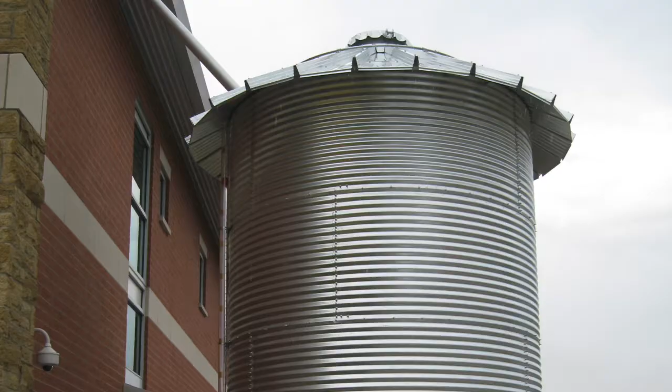Bill Mollison, the father of permaculture, and David Holmgren began producing ideas based around continual agriculture practices in the 1960s. Mollison and Holmgren were concerned with the increasingly negative effects of industrial agricultural practices in Australia, such as reducing biodiversity and removing loads of fertile topsoils from numerous landscapes.

Permaculture 1 was their first public response to these mounting pressures in 1978, detailing their design approach to agriculture they called permaculture. Within a few years, permaculture was expanded to include working toward sustainable human habitats. Further work developing their concept and designing various sites led to Permaculture, a Designer's Manual.

Mollison continued to teach the practices of permaculture and put an emphasis upon having his students continue to teach the topic as well, which helped spread the concept around the world relatively quickly.

Permaculture, as we all know, is based around three main goals: care for the earth, care for the people, and return of surplus. The resulting combination values equally the vital aspects of the environment, the needs of human populations, as well as taking only what is needed from the world and reallocating extra resources appropriately.

Designing of ecosystems, landscapes, and human structures is based around the 12 core design principles, each of which is as valuable as the next. When planning any scale of permaculture project, accounting for and utilizing rainwater, as well as groundwater or stored water sources, depending on the site in question, is an incredibly valuable aspect of the plan.

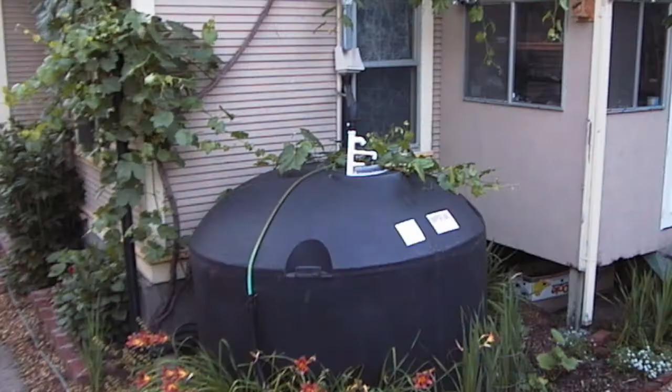A term that is often heard in regards to water resources is greywater. Greywater is simply wastewater generated from domestic activities such as dishwashing, laundry, and showering. Although greywater is not potable drinking water without prior filtration, it may be used for landscape irrigation, among many other uses. Greywater is not from toilets. Toilet waters are considered sewage or black waters to emphasize that it contains human wastes.

Reusing black waters is more complicated and difficult than greywater due to the hazardous nature of wastewaters, but success has been found using these waters in a type of composting known as humanure. Humanure can be a complex system, but needs only to involve the sanitary containment system, usually with organic materials such as sawdust or wood pulp, to help facilitate the composting of wastes over time, as well as a garden or area to use the fertilizer once produced.

Rainwater harvesting systems have come in all shapes and sizes over the years, often becoming more complex in order to better store water safely for longer periods of time. Systems now include specified downspout sizes that increase in price much more rapidly than in size, depending upon the amount of roof in question. This only emphasizes the amount of planning needed for each permaculture project.

Types of systems available are simple tanks, filtration tanks, roof cleaning collection, rooftop collection for gravity-based distribution, and stormwater collection systems. All systems are scalable depending on the size of the structure or structures involved. Examples of each system can be seen here.

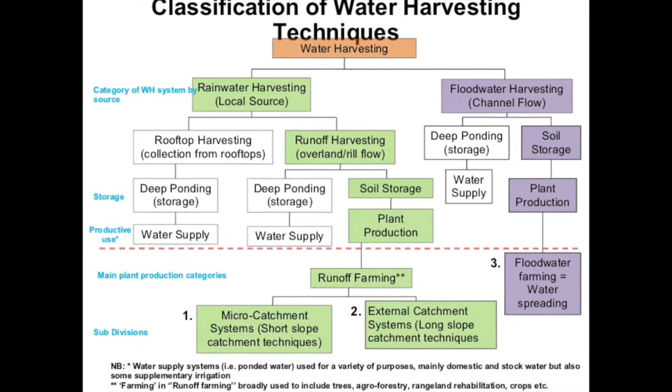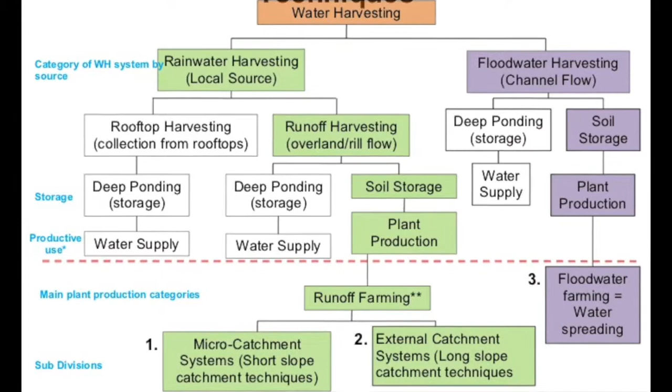Water harvesting techniques include a multitude of iterations in such areas as rooftop harvesting, runoff harvesting, floodwater harvesting, runoff farming, floodwater farming, and more. Uses of these collected waters can include soil storage, deep ponding storage, water supply, and plant production as seen here.

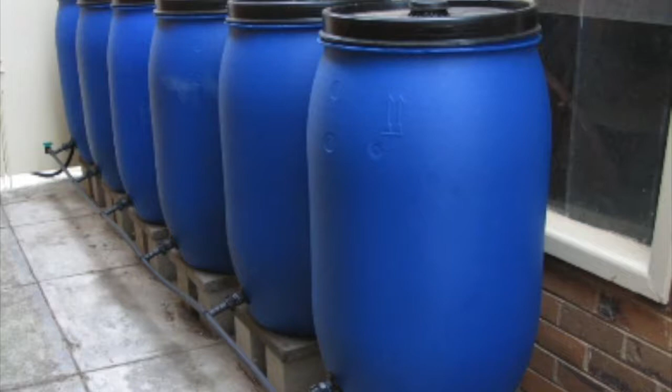Rainwater harvesting with rain barrels is one of the most basic forms of collection and harvesting. Gutter systems simply transfer rains to the barrel placed beneath them. The size of the gutter and downspout should be planned out before installation, but are typically 5-inch gutters and 3-inch downspouts for residential buildings. Placing the barrel as near to the designated usage of the stored water, such as garden in the backyard, maximizes ease of use.

Residential rooftop harvesting, shown here, is utilizing an underground storage container. This system incorporates a header tank in the eaves of its attic to provide gravity-based distribution of stored waters to various water use areas of the house.

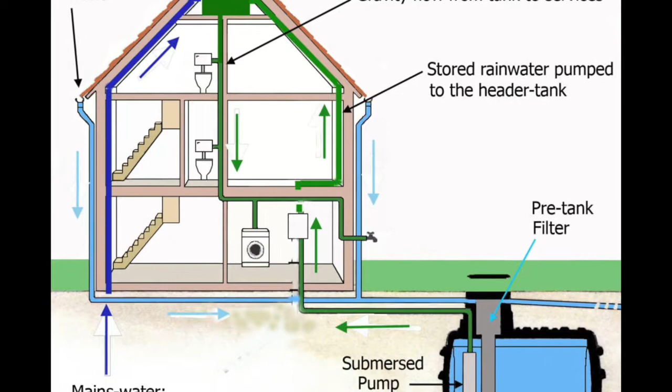The submersed pump in the basement, connecting the below-ground filtered tank waters to the header tank, requires energy input and piping construction within the building, but allows for an efficient distribution and usage of stored harvested waters throughout the residence. This system also connected the header tank to the mains water system to maintain water levels during seasons of drought.

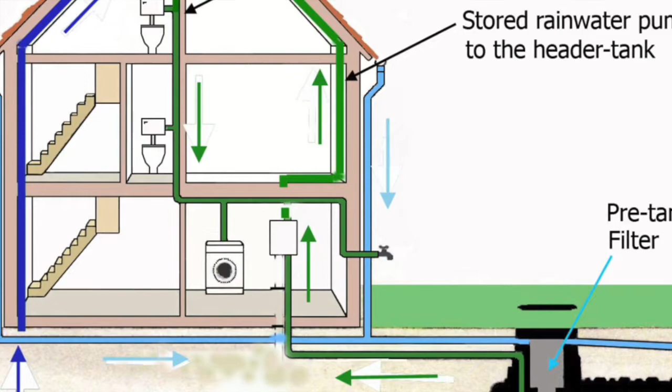Groundwater storage systems are increasingly seen constructed and used in many areas. Utilizing tracts of land as a catchment area can be viable for surface types such as clay tiles, plastic, or asphalt sheets, but requires prior management, potentially including contouring and surface cover removal.

A designated collection tank in the lowest elevation region of the landscape must be made or brought in to match the size and goals of the site, whether for a community garden nearby or for farm water supply supplementation. Extraction devices include bucket, chain, hand, and electrical pumps, along with rope pulley systems, depending on factors including the rate of transfer from the site to its destinations.

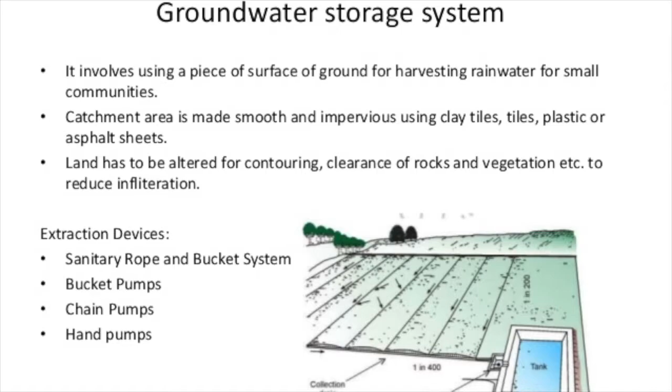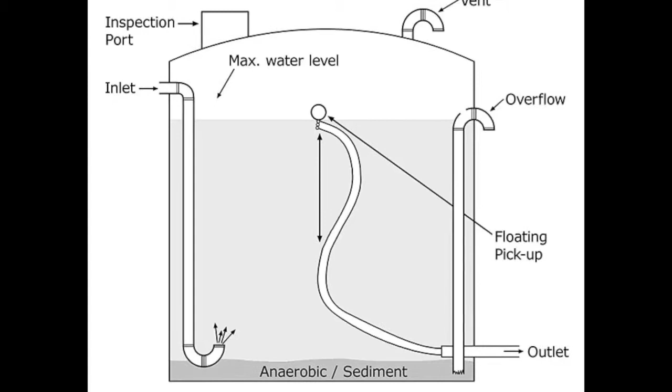Here is an image with the general outline of water storage tanks. Each tank is recommended to have darker colored plastic or denser materials to prevent light infiltration and organism and microorganism growth. The inspection port allows for regular assessment of the tank's sanitation levels and storage rates. The floating pickup access point allows for debris to be removed from the tank with ease as well.

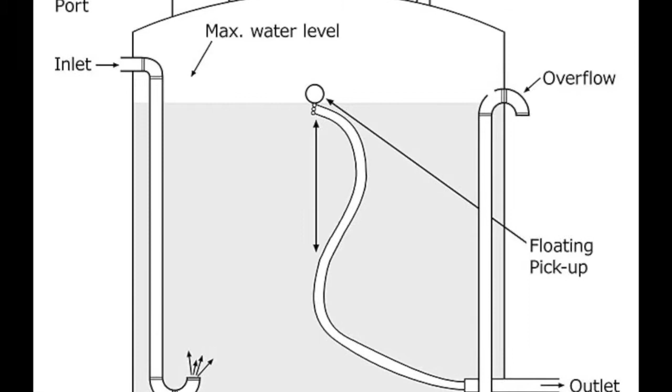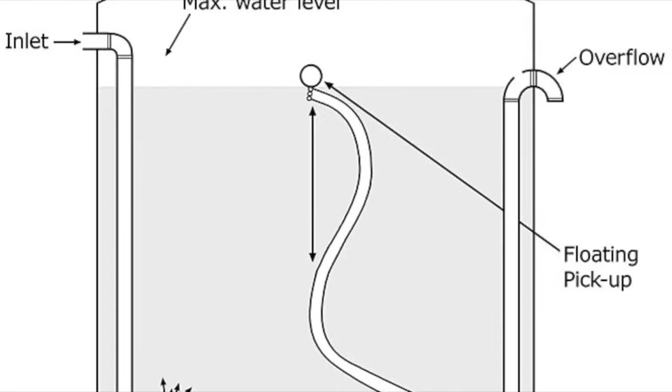A vent and overflow valve are vital aspects to maintaining the water for long periods of time and through storm rain events. Emptying out particulate matter and settled sediments is also a necessary regular maintenance activity for most storage tanks. These can be used in agricultural, residential, industrial, and cultural settings for numerous similar uses.

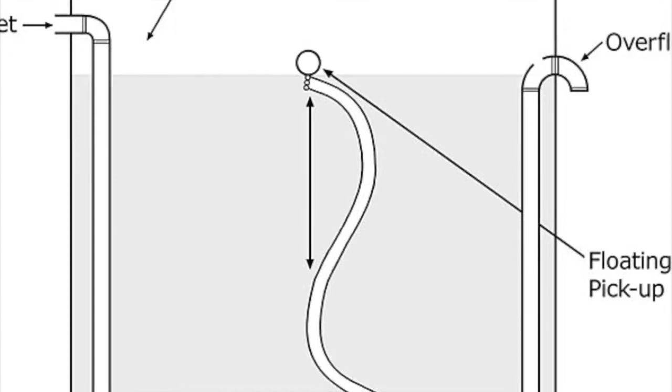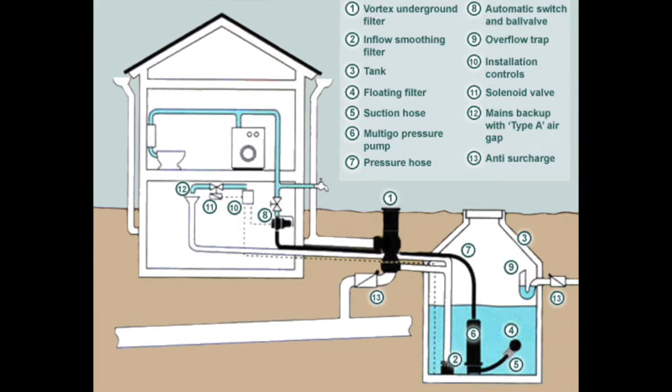Complex systems employ multiple levels of filtration for optimal drinking water and cleaning waters. Pressured hoses and piping systems allow for more efficient and energy-saving transfer of water throughout the entire house, tank, and water main or well. This system employs safeguards such as anti-surcharge piping with a U-shaped design to allow excess water to leave the system while preventing groundwater and storm waters from entering the tank.

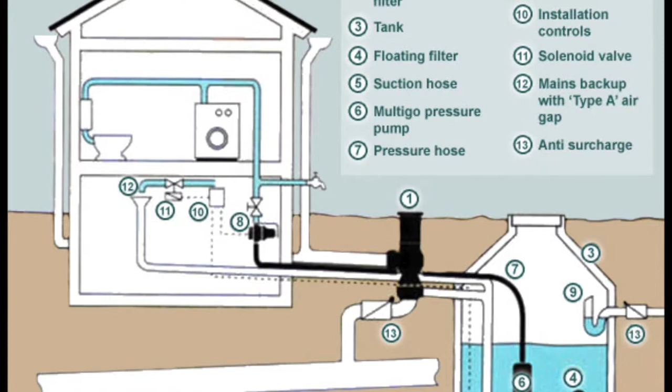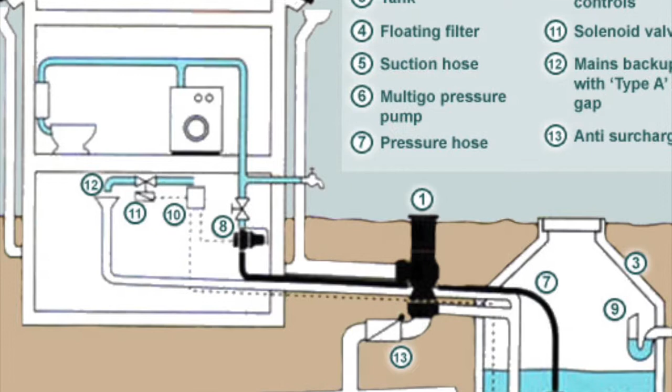The solenoid valve is an electromechanically operated valve that serves multiple purposes such as shutting off, releasing, dosing, distributing, or mixing fluids, and can be valuable assets to rainwater storage and distribution systems.

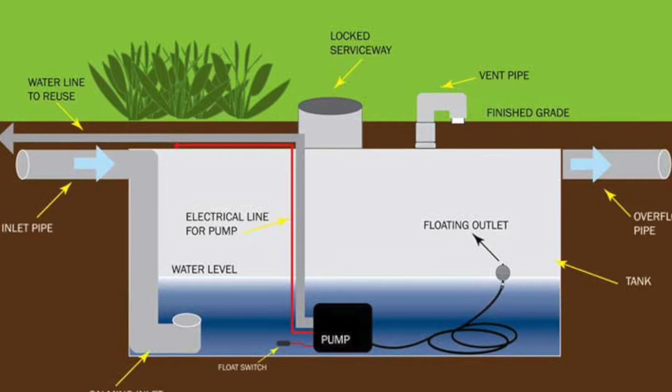Groundwater harvesting systems, such as this, involve submerged tanks that require a location with access to significant surface and through-flow waters. These systems must be well planned out before installation as they call for intensive land removal and construction and require significant measures of regular facilities checking for sanitation, filtration, and continued successful working of each aspect of the system.

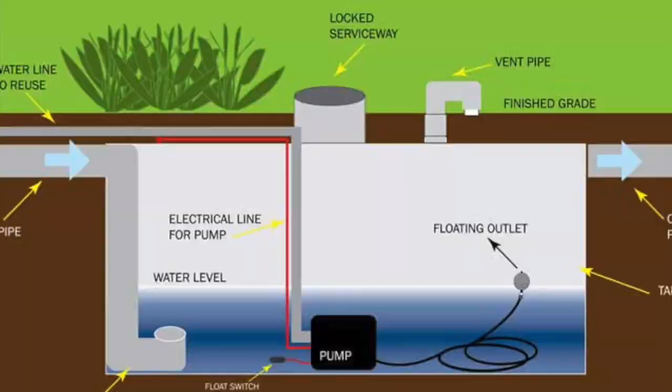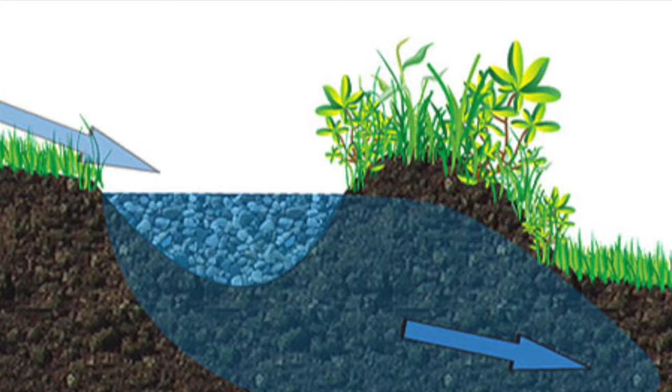Swales are a crucial aspect in the development of gardens and permaculture projects for the express purpose of allowing better retaining of natural water on sloped landscapes for plant growth. A swale is typically completed by digging out a long straight line of poorly infiltrated grasslands and planting water-intensive crops in the mounds developed immediately below the depressions along the gradient of the landscape.

Swales are a useful tool for numerous permaculture sites, but are not necessarily the correct way for many sites to collect and distribute water through their landscapes. Rainwater harvesting can also include water bodies, such as pond gardens for water supply, storage, and ecosystem development. Man-made ponds for permaculture sites such as this allow for further growth of a project with the pond as the focal point at the lowest point of a landscape's gradient.

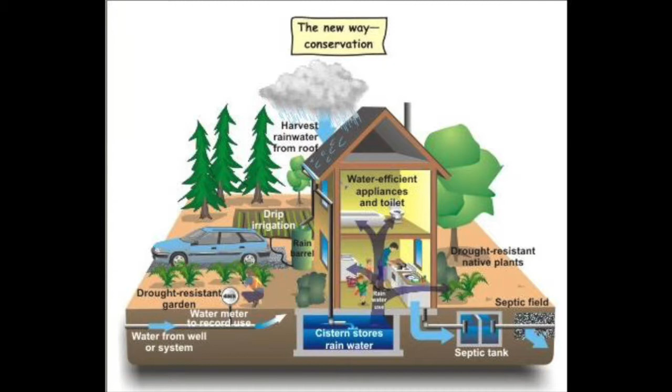Rain ponds require maintenance and monitoring to preserve water quality after storm rain events and during seasons of drought to maintain water levels for surrounding flora and fauna. Rainwater harvesting, as summarized here, is a simple concept that requires significant planning as well as a main purpose for each level of rainwater collection.

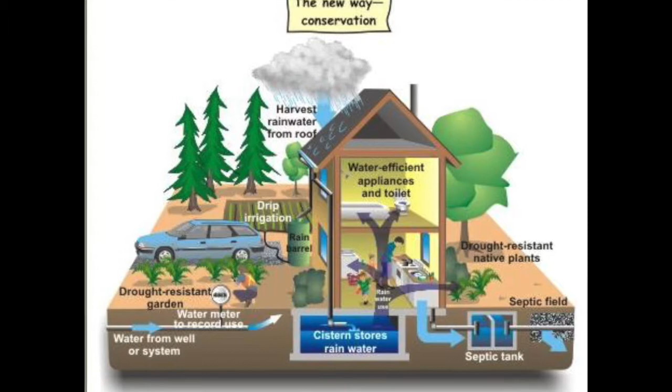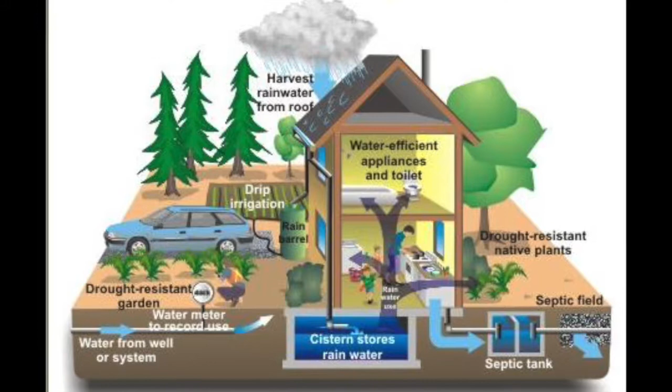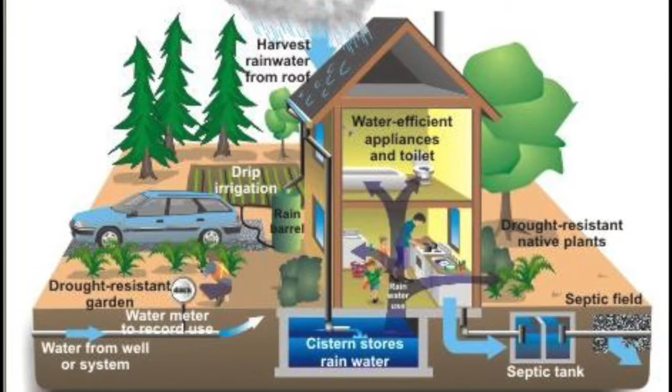Uses of rainwater are growing each day with continued permaculture projects and agricultural practices such as hydroponics. Hydroponics incorporates all of the necessary nutrients for plant growth into the water they receive on a timed basis, allowing for very productive plant growth without direct land inputs, and could potentially become a highly sustainable form of food production on a larger scale in the near future.

In conclusion, permaculture and water are closely interrelated topics that both offer much individually, but together can produce incredible techniques and management methods for food production, natural filtration, reduced energy use, and potentially a net positive ecological footprint for members of future generations with continued efforts towards sustainability and conservation of resources.